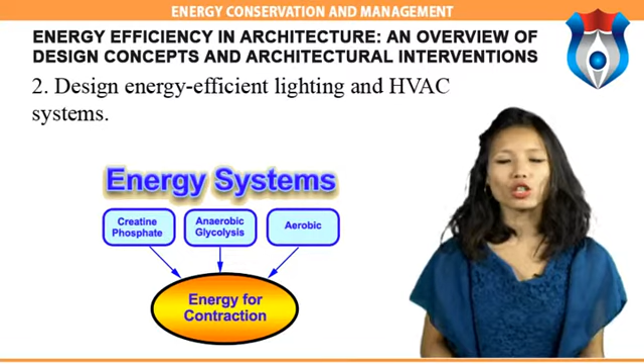Use renewable energy systems such as solar photovoltaic systems and solar water heating systems to meet a part of the building load. The pressure on the earth's non-renewable resources can be alleviated by judicious use of earth's renewable resources, that is solar energy. Using solar energy for meeting electrical needs for a building can further reduce consumption of conventional forms of energy.

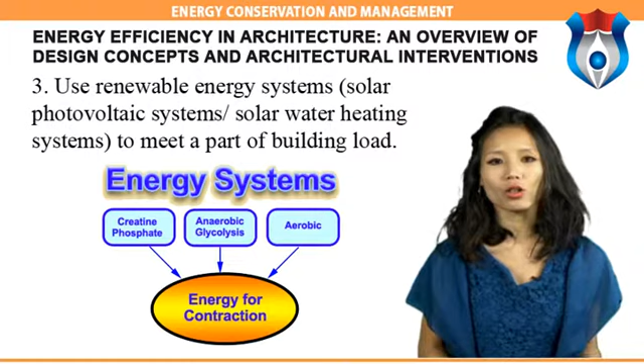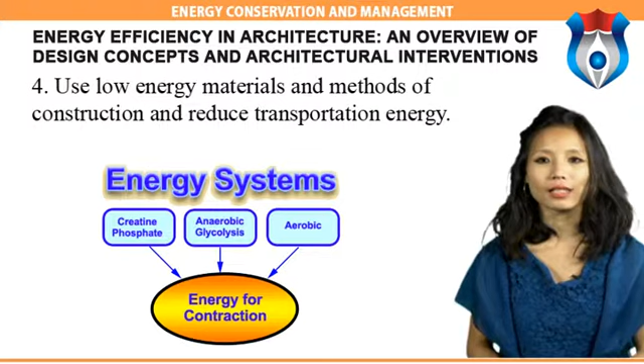Use low energy materials and methods of construction and reduce transportation energy. An architect should also aim at efficient structural design, reduction of use of high energy building materials like glass and steel, and reduction of transportation energy through the use of low energy building materials.

Now moving on to the next topic, we will study the importance of energy efficiency in buildings. Rapidly increasing energy prices, concerns about resource depletion and climate change, and calls for national energy self-sufficiency have concentrated people's minds on the role energy plays in our lives. Much of the effort is focused on securing sufficient supplies of oil, gas, etc. at affordable prices, but reducing energy demand at source can be a better alternative.

Rural India is more dependent on traditional biofuels. On average, 55% of households in India have access to electricity, this figure falling to 43.5% for rural areas. The construction industry is booming and is one of the largest energy consuming sectors in India.

Even a 10% reduction in energy use in buildings would have a significant impact on national energy requirements, and this could be achieved with little or no investment, simply by being more diligent in our use of energy in homes and offices. Energy use in existing buildings is also important to consider.

Since we replace old buildings with new ones only at a very slow rate, it is important to consider how we use energy in the buildings already there. The first step in an energy efficiency approach is to find out where the building uses most energy. An energy audit will pinpoint those areas and enable the most effective measures for cutting energy costs to be identified.

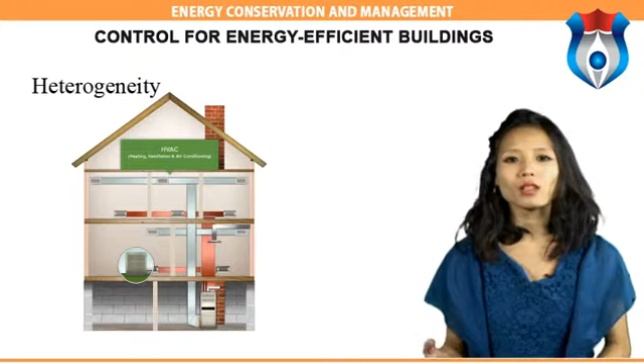For instance, building control is a complex hybrid problem that includes both continuous and discrete components. Major building systems operate in discrete modes; air handlers or chillers cycle on or off, as do compressors.

Complex relationship: building components can be connected in a variety of ways, which may cause complicated dependencies between local and system-wide phenomena. HVAC systems are potentially very large network systems with complex relationships between comfort in rooms or zones and the operation of individual HVAC components.

Challenges and opportunities in energy efficient buildings.

Entropy is the perpetual enemy of building operation. Building systems degrade over time, and today little can be done about it. Historical operational data is difficult to gather from building management systems. Accurate models are generally not available and are hard to develop, and the availability of skilled staff is limited.

Recent developments are helping overcome this difficulty with building information models, or BIMs. A standardized way to describe aspects of buildings has become available. Most medium to large buildings now routinely capture large quantities of operational data, and energy efficiency and load management have become high priority imperatives.

Performance monitoring and health management: physical and control system faults in HVAC systems cause inefficient operation, increase energy use, and reduce equipment life. Many of these problems could be prevented with widespread adoption of automated performance monitoring and equipment health management.

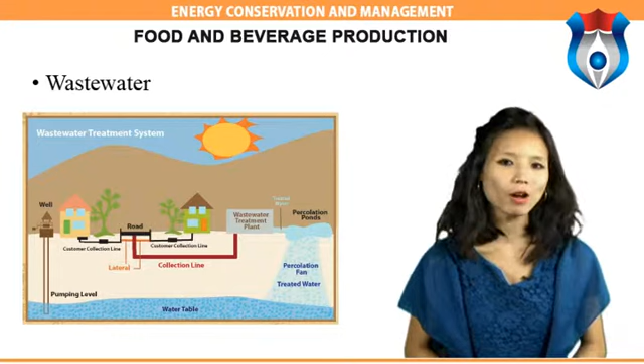Wastewater typically contains organic waste, chemicals, and detergents used in various processes including cleaning. In addition, effluent may contain pathogenic bacteria, pesticide residues, suspended and dissolved solids such as fibers and salt particles, nutrients and microbes, and variable pH.

This is a very basic overview of the water treatment process. Customers always need water, but rainfall is seasonal and increasingly unpredictable. So we often use storage reservoirs to make sure there's always a supply for treatment.

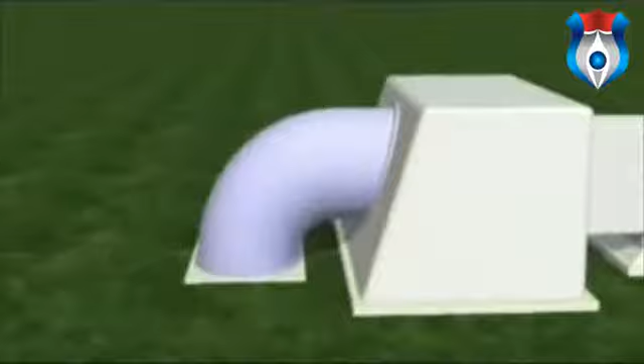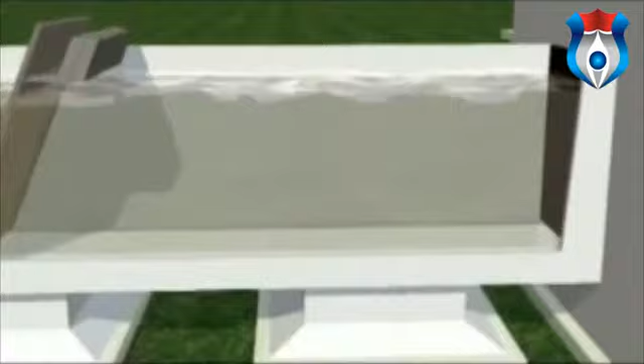By passing water through mesh screens, we remove sticks, water weeds, and other large foreign objects. The air takes some odours and gas from the water and allows some dissolved metal salts to separate to be filtered out. We add air by cascading the water down a tower, spraying it into the air, or bubbling air through it. At this stage, there are still some fine pieces of matter suspended in the water, along with colour and bacteria.

We add a precisely controlled amount of a coagulant like ferric or aluminium sulfate. This reacts with the material in the water, making it all stick together to form what's known as floc. To make this flocculation happen, water and the coagulant have to be mixed together very quickly and thoroughly in a special device called a flash mixer.

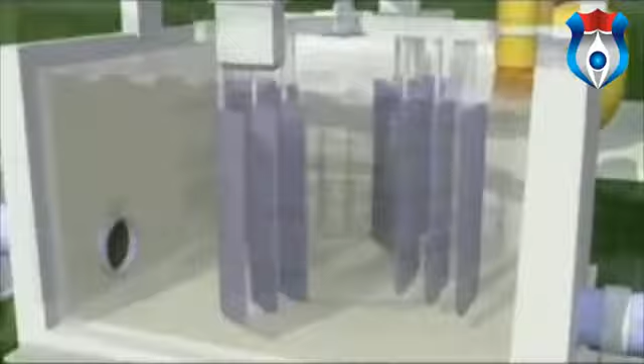Next comes the clarification process. The floc forms itself into sludge and is separated in a specially designed tank called a clarifier. This sludge layer is called the sludge blanket. To control the blanket, sludge is periodically drained off, concentrated, and removed for safe disposal.

Particles filtered out on the RGF, the rapid gravity filter, are removed by backwashing. The water now needs filtration to get rid of any remaining particles. Water is filtered slowly through very fine sand or sand-like material.

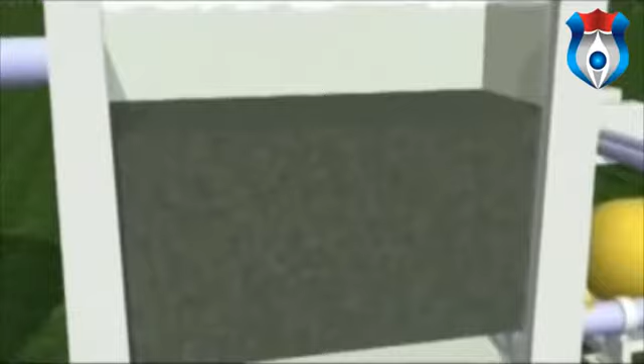For some river waters, we use ozone gas injection as a treatment stage. This can work in conjunction with GAC, or granular activated carbon treatment, where the water is filtered through carbon granules to take out any undesirable traces of largely natural organic materials. The carbon in these filters is removed and regenerated by heat so it can be used again.

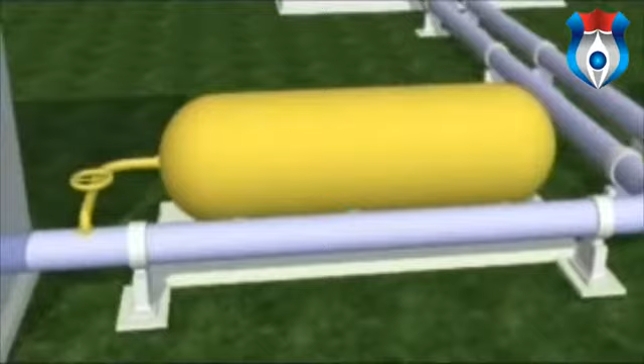Now the water's filtered and thoroughly cleaned, it's disinfected to make sure no harmful bacteria remain. A small controlled amount of chlorine is the most effective method and provides essential customer protection. This method is used across most of the world. The chlorine has to stay in contact with the water for a period of time for effective disinfection.

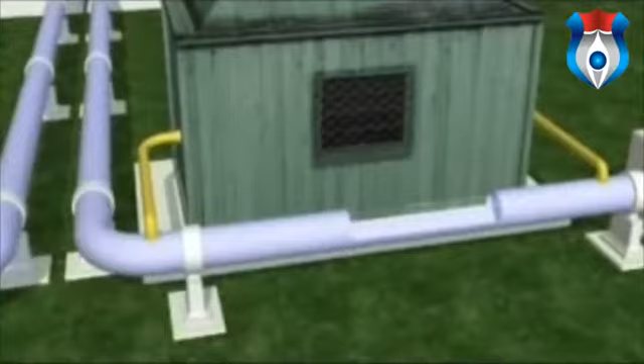Last but not least, adjustments are made to the pH levels of the water during the treatment process so that it's neither too acid or alkaline. This helps pipework, fittings and the water itself.

From the treatment works, water is fed into a huge mains pipe network, nearly 43,000 kilometres long, which forms a grid around the region. This grid is then accessed directly to your home, and when you turn your tap on, it's available to you - clean, safe drinking water.

The Electric Power Research Institute reports that energy and energy-related costs represent INR 40,000 billion in annual expenditure. Commercial buildings constitute the most electric-intensive sector in the country, with 76% of energy services provided by electricity. It is estimated there are 4.7 million commercial buildings which consume 35% of the nation's total electricity.

Energy costs associated with heating, ventilation and air conditioning (HVAC) add up to one of the largest operating expenses for property owners. In most companies, the cost of energy is the largest unmanaged line item operating expense. With electricity rates skyrocketing, being able to control a building's energy usage represents a huge savings opportunity.

Many utilities have raised their rates more than 70% over the last 2 years, and in some cases costs more than doubled. With rising fuel costs, rates are forecast to continue in this direction.

Components: To manage and monitor the amount of energy used to heat and cool commercial buildings, the following components are needed - Packaged Terminal Air Conditioning (PTAC), Central Air Conditioning or Package Units. A PTAC is a self-contained air conditioning unit and may incorporate either a heat pump or electrical resistance heating.

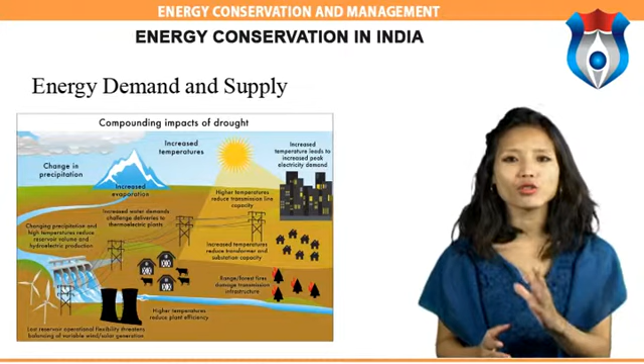Energy demand and supply: On the energy demand and supply side, India is facing severe shortages. 70% of the total petroleum product demand is being met by imports, imposing a heavy burden of foreign exchange. The country is also facing peak power and average energy shortages of 12% and 7% respectively.

Importance of energy conservation: In a scenario where India tries to accelerate its development process and cope with increasing energy demands, conservation and energy efficiency measures are to play a central role in energy policy. A national movement for energy conservation can significantly reduce the need for fresh investment in energy supply systems in coming years. It is imperative that all our efforts are made to realize this potential.

Conservation is an objective to which all citizens in the country can contribute. Whether a household or a factory, a small shop or a large commercial building, a farmer or an office worker, every user and producer of energy can and must make this effort for his own benefit as well as that of the nation.

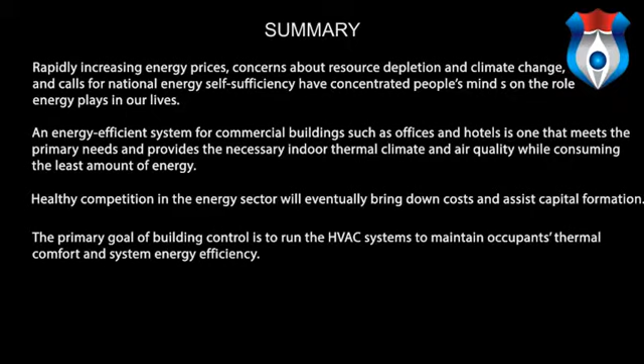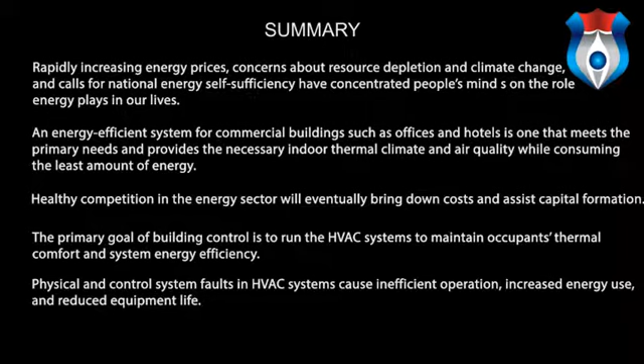The primary goal of building control is to run the HVAC system to maintain occupants' thermal comfort and system energy efficiency. Physical and control system faults in HVAC systems cause inefficient operation, increase energy use, and reduce equipment life.